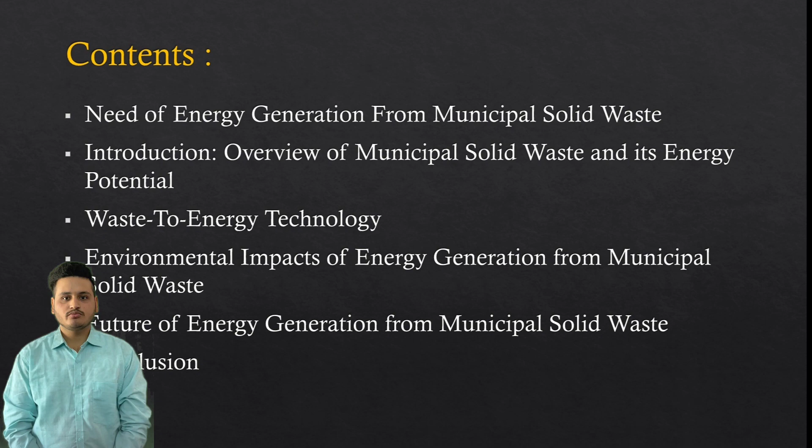My seminar topic is energy generation from municipal solid waste. This is going to be our list of contents. Firstly, the question arises, why do we need to generate energy from municipal solid waste?

Energy from municipal solid waste can provide a number of benefits, both environmental and economic. Firstly, renewable energy from municipal solid waste can help increase the use of renewable energy sources, which can help reduce reliance on fossil fuels. Then the greenhouse gas emission is very few, and it also helps with waste disposal. It also provides economic benefits through the sale of electricity or the use of the generated energy to offset energy costs for municipal facilities.

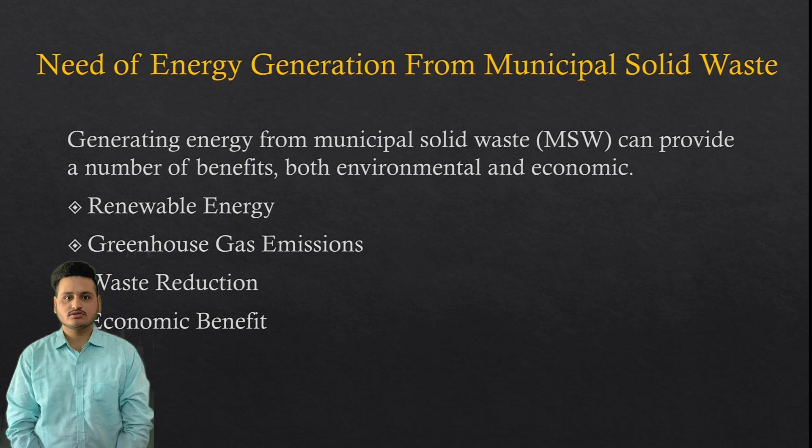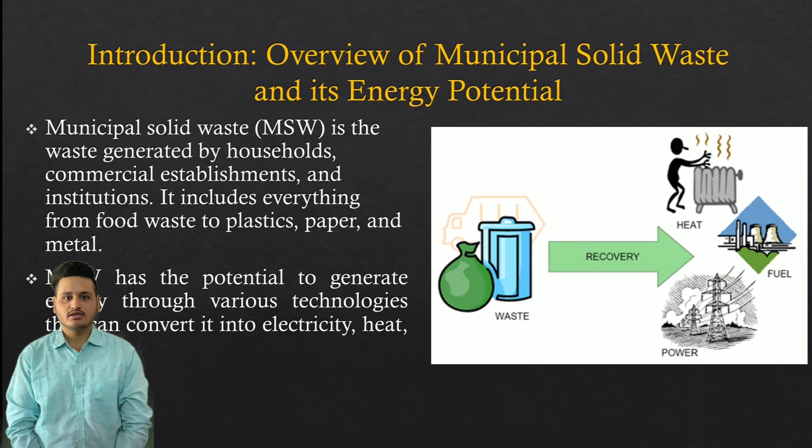Municipal solid waste is the waste generated by households, commercial establishments and institutions. It includes everything from food waste to plastics, papers and metal. Municipal solid waste has the potential to generate energy through various technologies that can convert it into electricity, heat or fuel. So there are several technologies that can be used to convert municipal solid waste into energy.

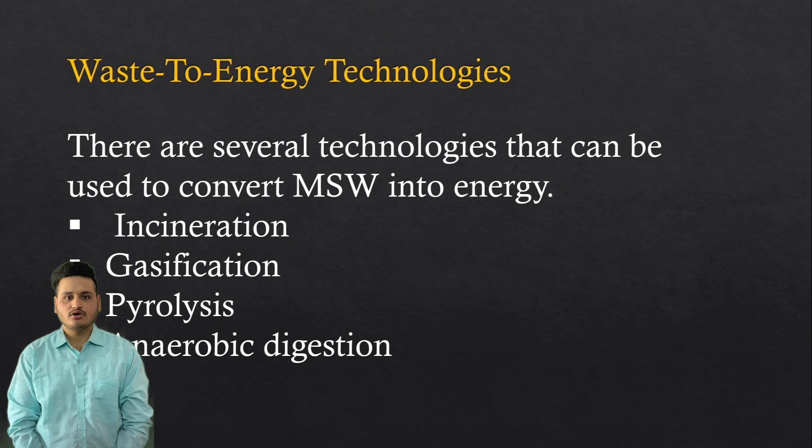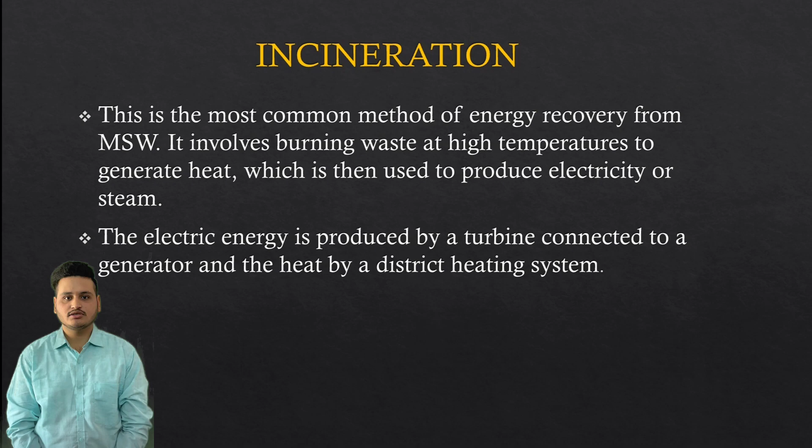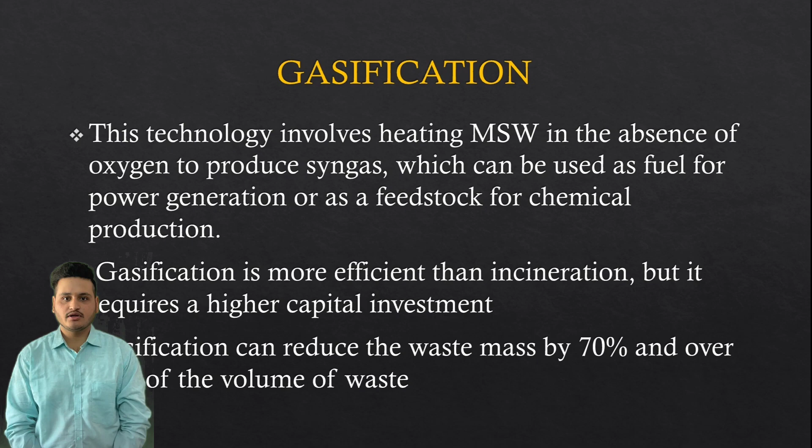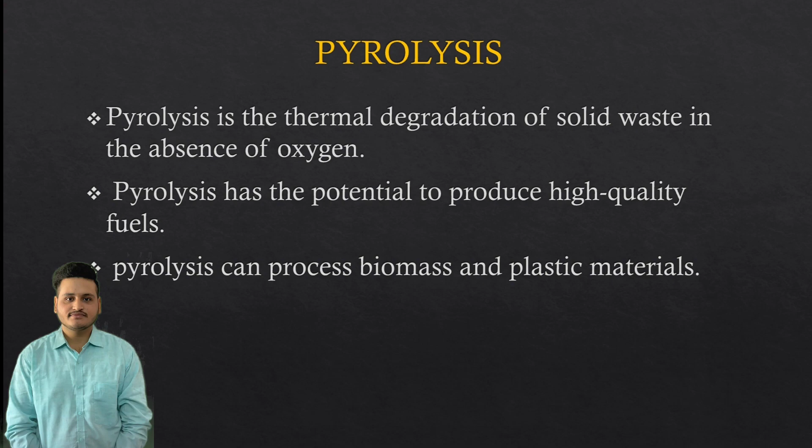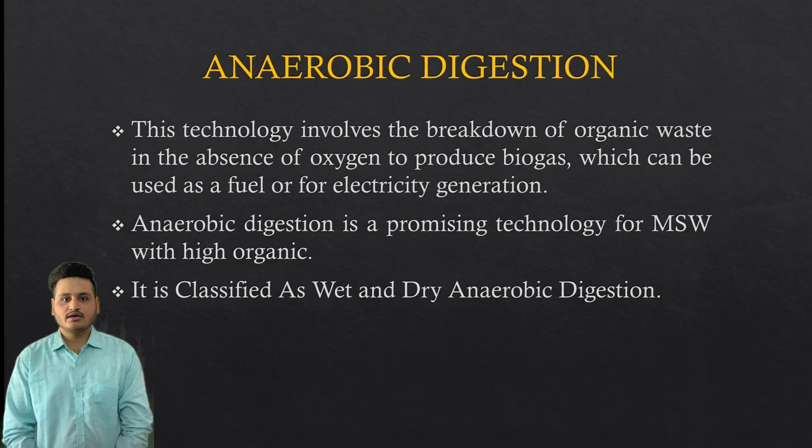The last one is anaerobic digestion. This technology involves the breakdown of organic waste in the absence of oxygen to produce biogas, which can be used as fuel or for electricity generation. Anaerobic digestion is a promising technology for municipal solid waste with high organic content. It is classified as wet and dry anaerobic digestion. This is the anaerobic digestion process.

Now we discuss the environmental impact of energy generation from municipal solid waste. It reduces greenhouse gas emissions because municipal solid waste contains organic materials that can generate biogas through anaerobic digestion or produce energy through incineration. Biogas and energy generation from municipal solid waste can offset greenhouse gas emissions, which can help mitigate climate change.

The second one is waste reduction. Energy generation from municipal solid waste can also help reduce the volume of waste going to landfills, which can extend the life of existing landfills and reduce the need for new ones. This can help conserve natural resources and reduce the environmental impact of waste disposal.

Now next is water pollution. Improperly managed municipal solid waste can contribute to water pollution, especially when landfills are located near water sources. However, energy generation from municipal solid waste can reduce the volume of waste going to landfills and decrease the likelihood of water pollution incidents.

And the last one is land use. Landfills are a common method for disposing of municipal solid waste, and they require large areas of land for storage.

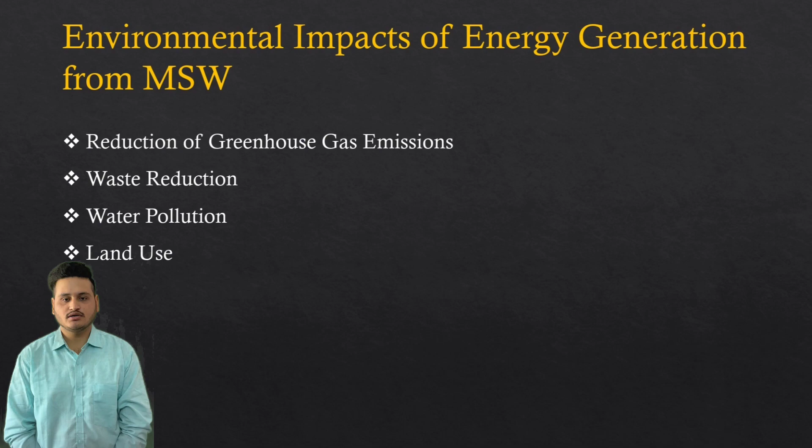Now we discuss the future of energy generation from municipal solid waste. There will be advancements in waste to energy technologies, and also government incentives and policies. Integration of energy recovery in waste management systems will be there, and public awareness will increase.

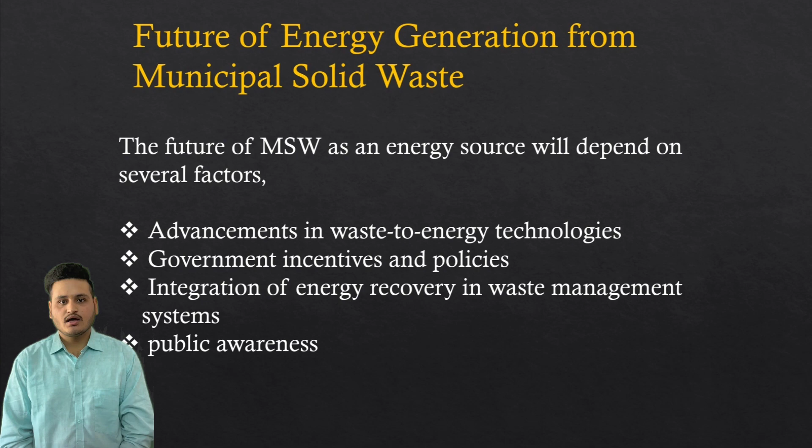So now we have reached the conclusion of the topic. If a country generates electricity by using these technologies, then it's one of the best economical solutions to the problem. Seen after all the problems around the world, work will start on this. The technology of generating electricity is good to keep the environment clean. Still, there is a requirement to research to improve its efficiency.